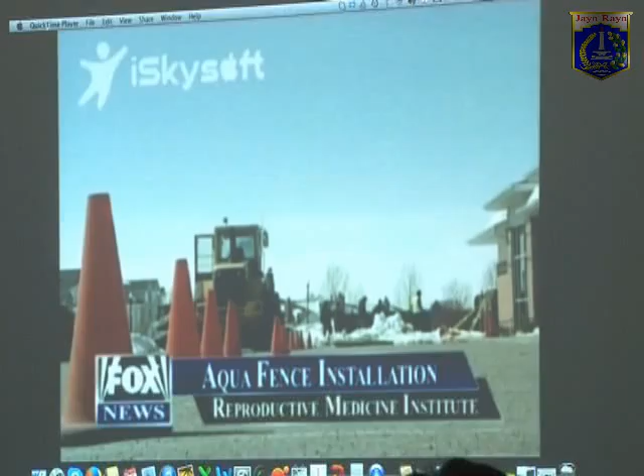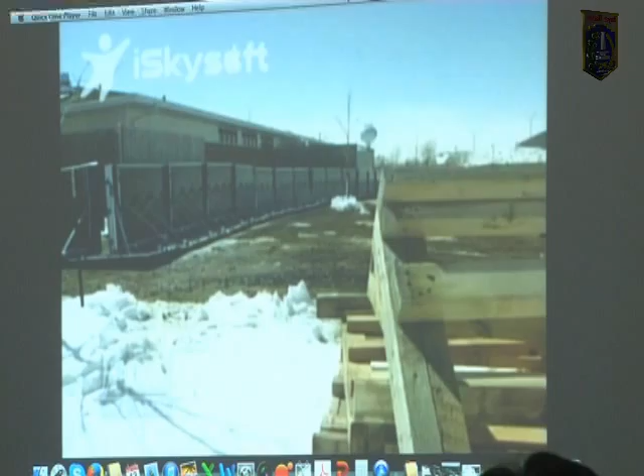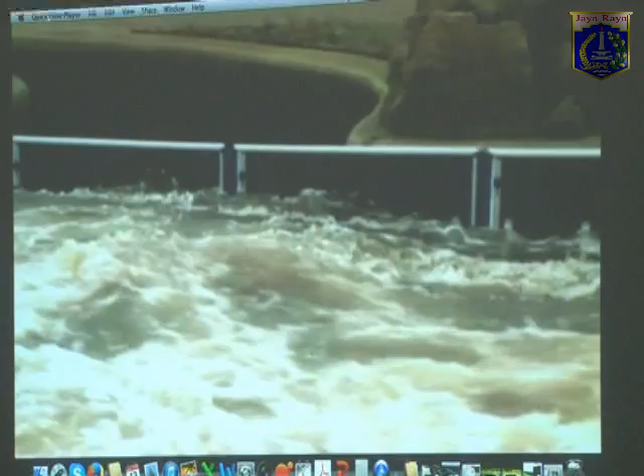These are statements from Aquafence's clients describing their experiences with the product. Meanwhile, Sanford Health is getting ready for the flood with a new flood protection system. Crews are installing a flood protection wall called the Aqua Fence at Sanford Health's Reproductive Medicine Institute. We are very sure that all the contents within the department are going to be safe. Fargo, Cass County Electric, and Sanford Health have purchased 3,600 feet of Aqua Fence. Once the floodwaters recede, the wall can be taken down and stored for later use. Aquafence is made from plywood, aluminum, stainless steel, and canvas. Units use water as a stabilizer, so as water rises against the wall, the system becomes stronger and less permeable.

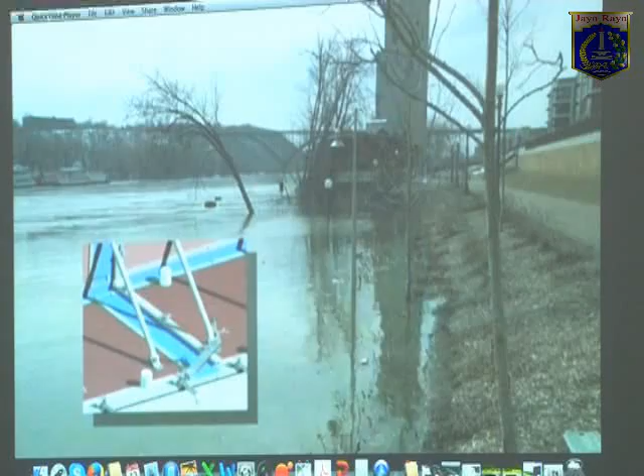When you are called upon to protect assets and lives, it is critical that you feel confident in the flood protection system you choose. You require a system that is effective and proven, and that instills in you peace of mind.

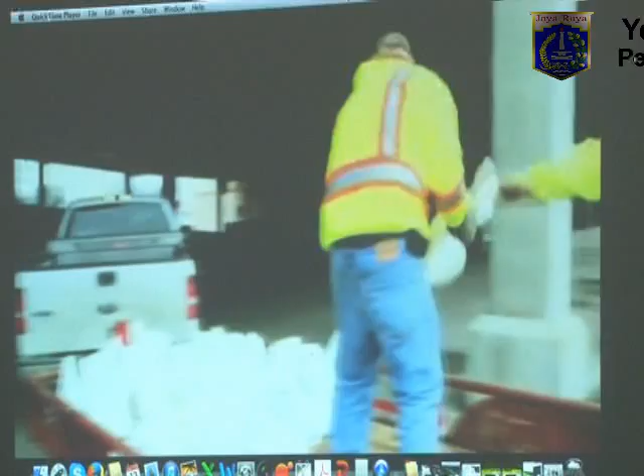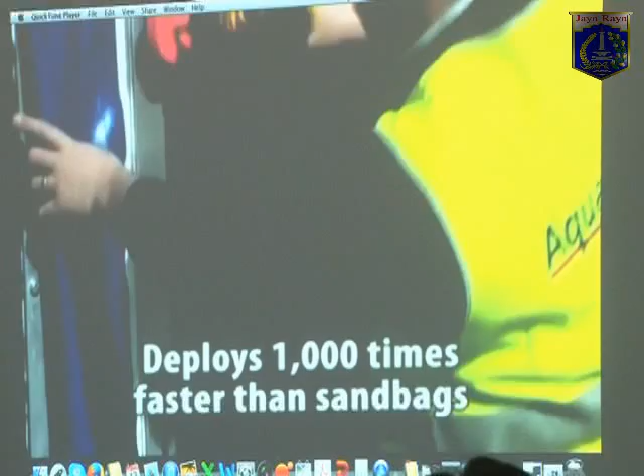Aquafence is the optimal alternative to sandbags and levees. It is mobile, reusable, and certified. It outperforms competitors regarding water seepage, and deploys 1,000 times faster than sandbags. It is a cost-effective investment with a long life cycle and high reliability, ensures minimal disturbance to the community, and is green: it does not absorb toxic waste, has no environmental impact on the deployment site, and reduces CO2 emissions. It provides flexibility and is available in various heights, is easily disassembled, stacked and stored in a warehouse, and can help keep insurance premiums low.

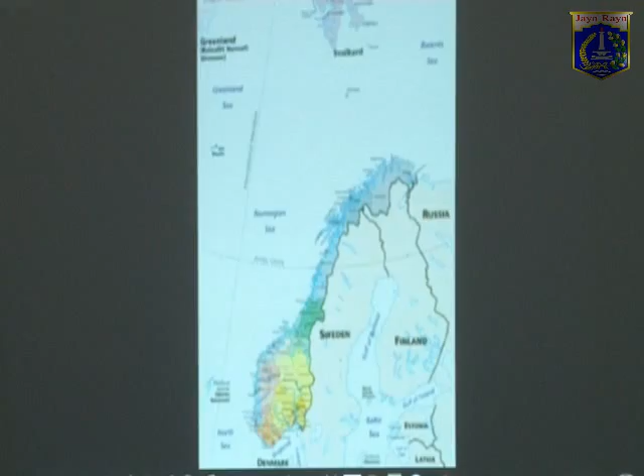Aquafence is designed and produced in Norway and serves flood-threatened communities throughout the world. Founded in 1999, Aquafence now has international local representatives who are available to discuss your needs with you. For more information or to find your local representative, please visit www.aquafence.com. Aquafence: providing peace of mind through revolutionary flood protection.

First of all, Indonesia is one of the most affected countries for flooding, we know that. But surprisingly, many people in the rest of the world believe flooding happens one time and then doesn't happen again. We try to tell people flooding is not a one-time event—it happens again and again, and if you don't protect yourself, disasters will happen again.

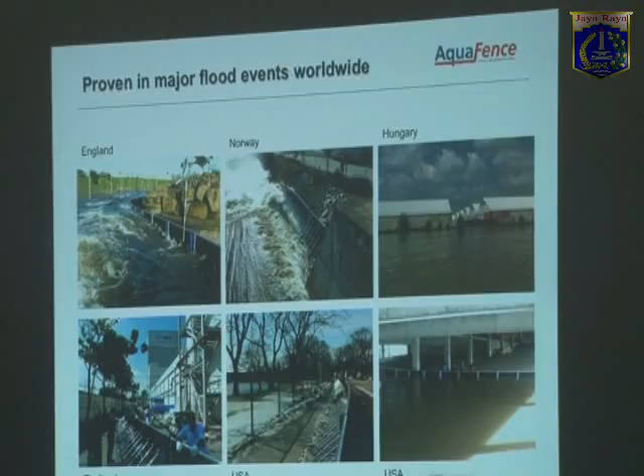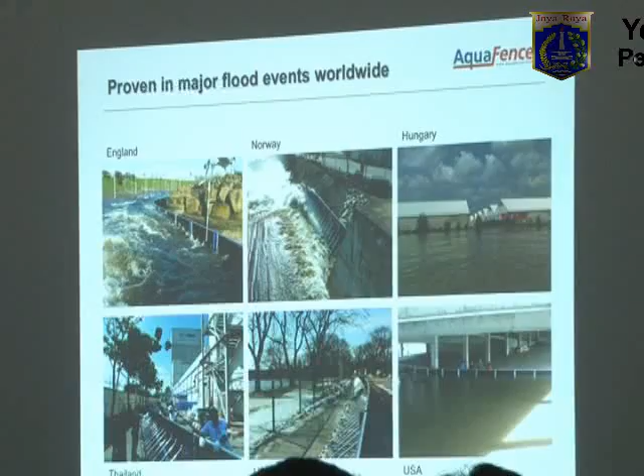Here you see different pictures of our products in use in Europe, in Norway, England, Hungary. In Thailand we are protecting factories. In the USA we're mainly protecting cities and small towns near rivers.

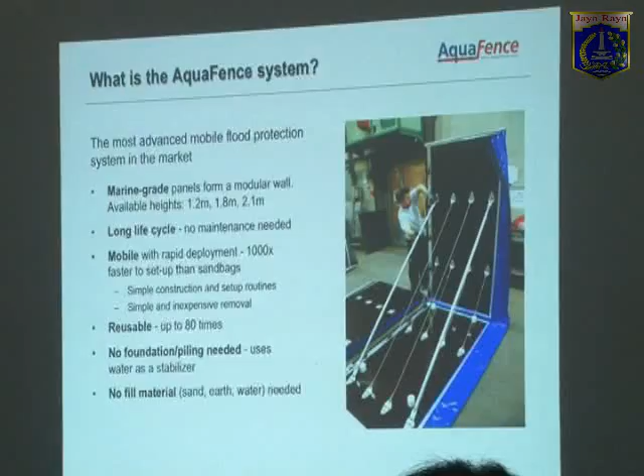So what is AquaFence? AquaFence is basically a mobile wall. This is what it looks like, this is a 1-4 model. It is a mobile wall whereby you transport it closed, and then you just open it up like this. It takes around 2 minutes to open up.

What you do is take individual modules and create a barrier, so it's very flexible. We have different heights up to 2.1 meters. Basically there's no maintenance needed, and this product lasts around 10 to 15 years.

It's very fast deployable. You don't need any fill material like sand for sandbags or any water. And most important, you do not need any ground preparation. You don't need to drill anything into the ground, you just put it onto the ground.

But the ground has to be in a flat condition. Correct, it needs a flat, firm condition - could be asphalt, concrete, compacted soil, anything firm. The reason it needs to be firm is underneath there's a water seal to prevent water from coming underneath. As the water rises, it presses down onto the seal to prevent water from going through. So when you see the system, the water comes from this way and not from this side. I'll explain in a moment how this works.

So how does Aquafence work? How can it protect against these strong forces of water? It uses a very simple engineering principle. As the water comes and rises, the downforce of the water pushes down on this bottom plate. And because the downforce of water is so great, you need only 10 centimeters of water to make this bottom plate very, very stable.

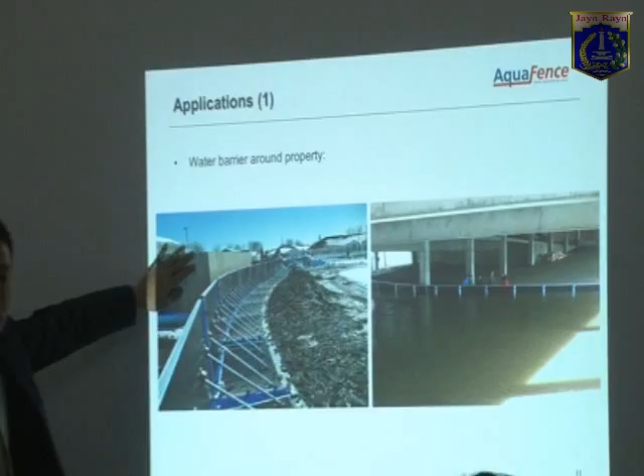We have different types of applications. One, we can create what we call a water barrier - let's say you want to protect this property, and you make a barrier around the property. Or for example here, this is a hospital, and here they make a barrier. That is the most typical application, to stop water from entering a property or an area.

The second application is you can actually deflect water. Here we have a river in the UK where they have to do construction work, so they're using our product to deflect the water. Here you also see a river where we use it to protect the riverbanks. This means you can create an ad hoc drainage canal to drain large amounts of water on a road - you put two Aquafence left and right, and you have an ad hoc drainage canal.

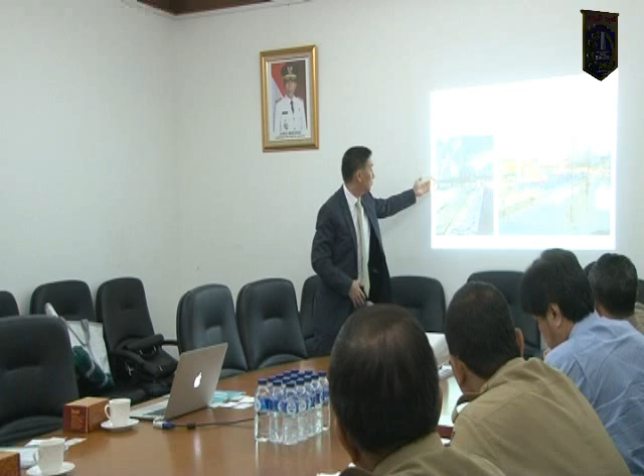The third application is preventing flooding, typically in Europe or USA, where in spring when the snow melts, the river rises, causing a lot of flooding from riverbanks. So here you protect riverbanks. This is also a very typical application.

And the last is actually protecting important roads from flooding. These are important highways, and here the police protect roads from flooding from the left side. So these are four typical applications that our product is used for.

Now, the good thing about our product is it's very flexible. So the same product can be used to protect a building, protect a city area, create a drainage canal, or protect roads, because it's a very modular and flexible product.

Because of this flexibility, we are quite successful and have gained a lot of attention, especially for the speed of assembly. Here we have a housing compound where we protect with a wall, and this wall was around 300 meters, installed in less than 3 hours by 10 people. So it's very quick to assemble the product.

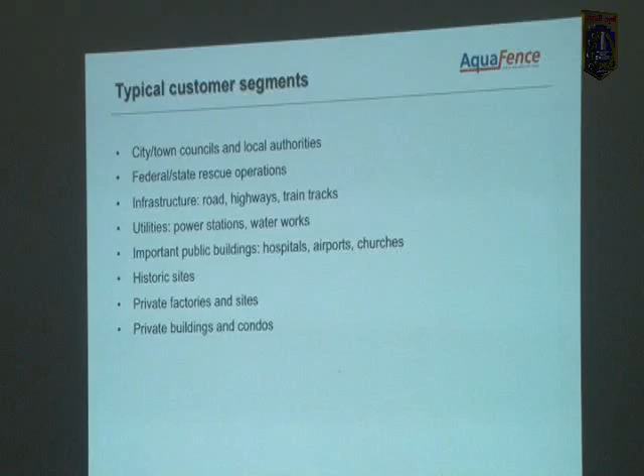Who are typical customers? City and town councils, local authorities, federal and state rescue operations, infrastructure like roads, highways, train tracks, utilities, power stations, waterworks, important public buildings, hospitals, airports, even churches, historic sites, and of course private factories, private buildings, and condominiums.

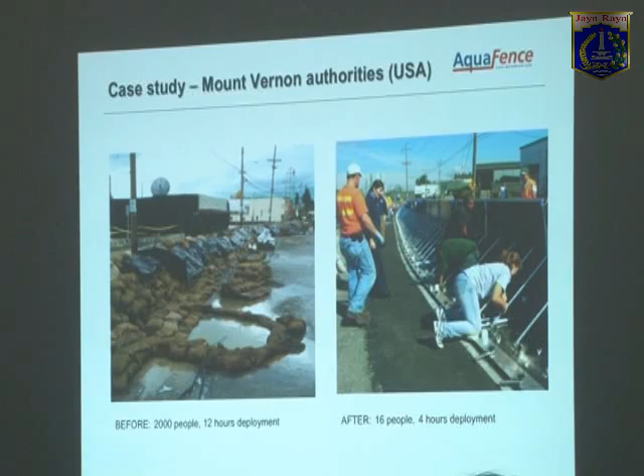An example of the speed: in the past, the city used to use 2,000 volunteers to make a sandbag wall, and afterwards it takes only 16 people for 4 hours.

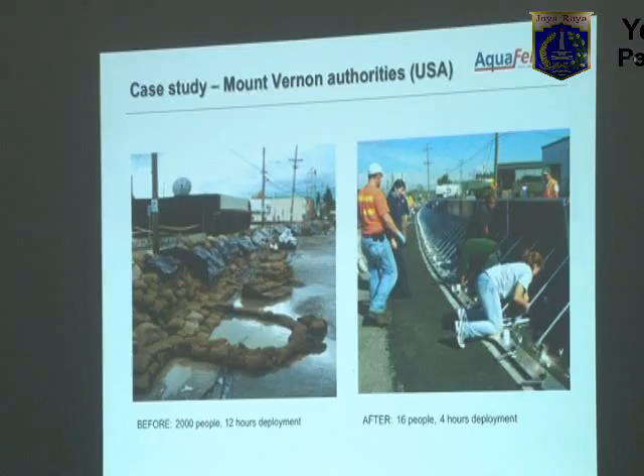At the moment, we are doing a lot of work in New York. New York was lastly affected by the major superstorm, Hurricane Sandy, and so now we are doing a lot of protection work in the city of New York.

We sell to two sectors. One is the private sector, where we protect factories and buildings. And the main reason for factory owners is that if your factory gets flooded...

It may take many months until your factory is up and running again. You lose revenue, you lose people, you lose market share. So for big factories, it's quite important to protect against flooding. One of our largest customers in Thailand is Nestle, where they protect 4 of their factories with Aquafence.

Many people ask, flood protection is expensive, is it worthwhile? It's a similar question if you ask yourself about fire protection or life insurance. If you don't need it, it's expensive. You need it only once and then it's cheap.

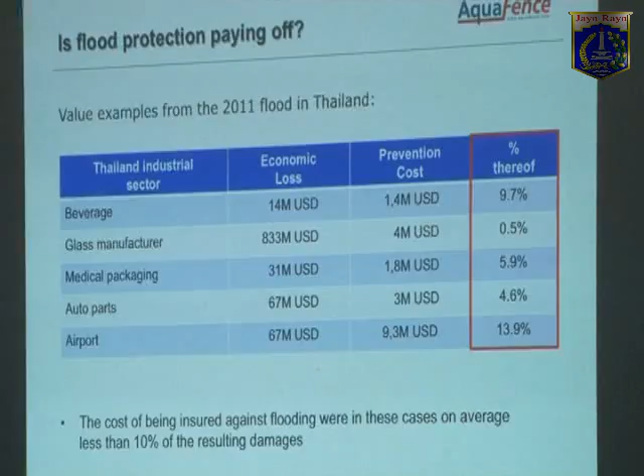In Thailand, during the 2011 floods, you see here 5 different industrial sectors. These were the economic losses in each of these sectors, and this would have been the cost for flood protection. So actually, we're talking about an average of around 8 to 10% of the potential damages which would have gone into flood protection. So if you need it only once, it's very cheap.

And if you can use it multiple times, it even lowers the cost of ownership.

Now last, I'd like to come to applications for governments. For government and public offices, what are typical risks? Obviously, there's a huge potential loss of lives. It's a worldwide image loss because pictures get transported through media and internet very fast. There's loss of trust from population, investors, tourists, loss of GDP, damage to public facilities, buildings, assets, and of course public inconvenience.

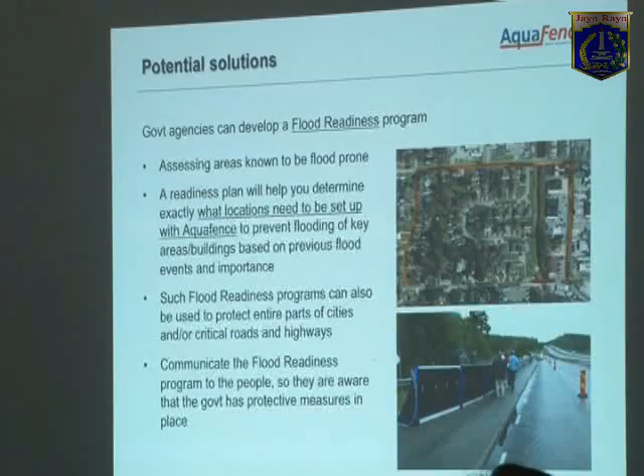What are potential solutions that we do in the rest of the world? What we do is what we call a flood readiness program, whereby cities or governments say, this is an area in our city which needs to be protected, and we're going to create a wall around the city. Once you know in advance which areas you want to protect, you can set up the wall, and within one day, basically that area is protected.

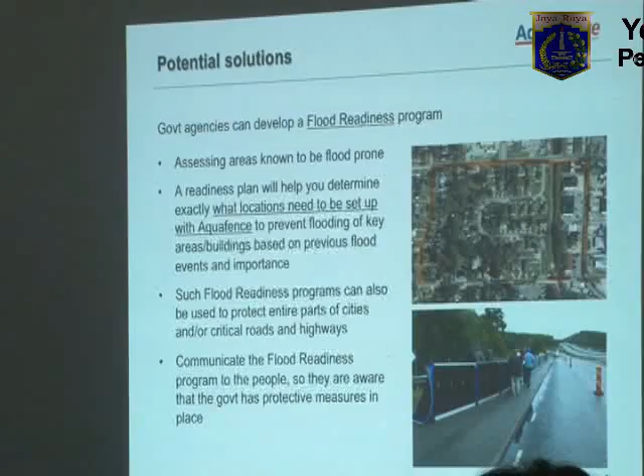Or for example, you know there's a very important highway, and we set up a wall here to protect the highway. Most important in flood protection is knowing in advance which areas you need to protect, and then you can prepare, because you can never predict where the water is coming.

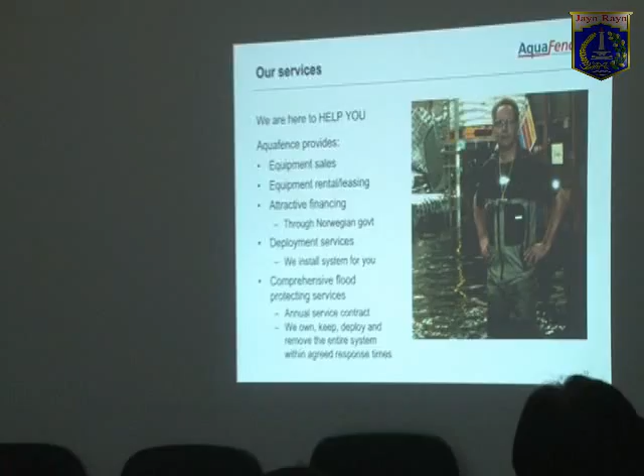This is my last slide. Basically, we are here to offer our experience and our services to the government of Indonesia. We typically work in the water, helping set up installations during actual flooding events, so we're not just sitting in an office. We do a number of things: equipment sales, equipment rental, leasing, financing, and also deployment services, whereby we can keep the equipment and you tell us which areas you need to protect. We come up with a plan and do everything for you: deploy the equipment, and when the flood threat is over, take it back. Instead of buying the equipment, we charge an annual service fee. We have many different options to help our customers and governments throughout the world.

This was my short presentation. I wanted to give you a quick overview about our product.

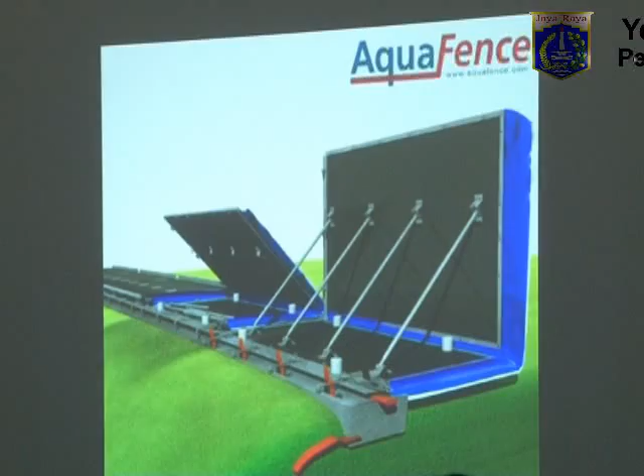You see now four elements, and basically you open it up like this here. Then you just put up these aluminum struts. Let me stop the video. What you see here, blue, is what we call a canvas.

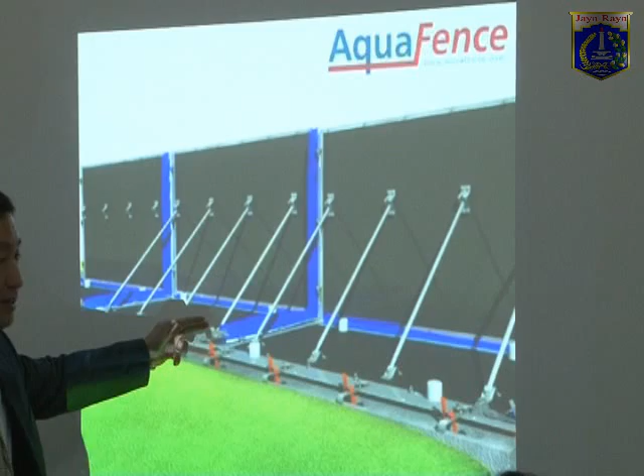This is what is here in blue. It's a marine grade canvas. You connect the canvas from one element onto the other side of the other element. So on each element, on one side you have the canvas, and on the other side you have a clamp. This one goes underneath the clamp and you tighten it. That's all—you do not need any tools, and this can be done by unskilled labor. You don't need to train your people. It's basically just lifting and connecting.

This canvas is water resistant. No, it's not a geomembrane. It is what we call a marine grade canvas, similar to what you use in sailing ships—a very, very durable material which is waterproof and cannot break.

Here you can see a video of how it works. This membrane is replaceable—all the items are replaceable, but we have never encountered a case where you have to replace a material unless there's physical damage, let's say something not assembled properly.

For this, how many meters? The highest we have is 2.1 meters. Because it's a modular system, you attach as many modules as you want to make a wall. So for example, if you need 100 meters, maybe you need 80 elements. If you need 20 meters, you need fewer elements.

Is this protection temporary or permanent? No, it's temporary—that's the advantage. If you know the flood is coming, maybe a few days before, you bring the elements, open them up, and protect the area. The moment the flood threat is gone, you can take it away. Typically this can be assembled within half a day or one day, and removed within one day. That means when there's no flood threat, you have no permanent structure to obstruct your view or your facility or area. It's a pure temporary and mobile solution.

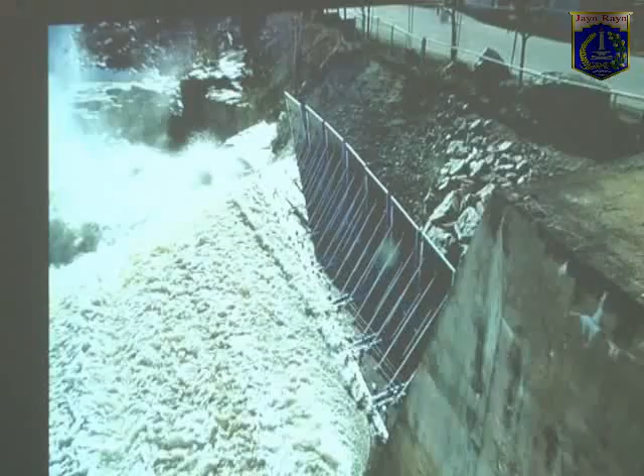Also, when you say that, if the water is very fast, can AquaFence protect? We have here a very interesting sequence. This is a dam in Norway where they have water flowing out at 60 kilometers per hour, and what happens is it erodes the riverbank. So they're using our system to protect it.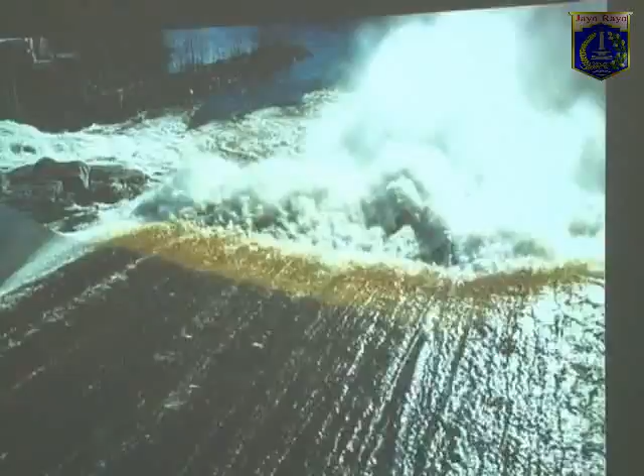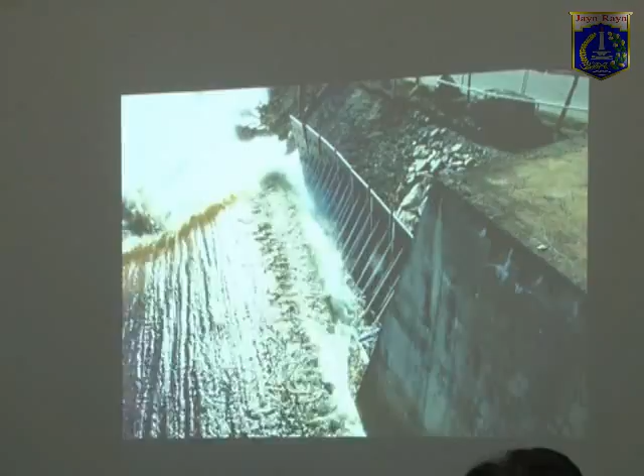And you see the speed of the water, and here we deflect. Here we're deflecting the water. And this is not fixed to the ground, it's just put on the ground and there's no movement. It's a very, very solid system. Benar sih, dia kena air itu menekan. Dia nggak perlu terlalu rata sekali juga sebetulnya, otomatis dia menekan, dia akan membentuk juga sendiri, saling nahan, ininya hebat.